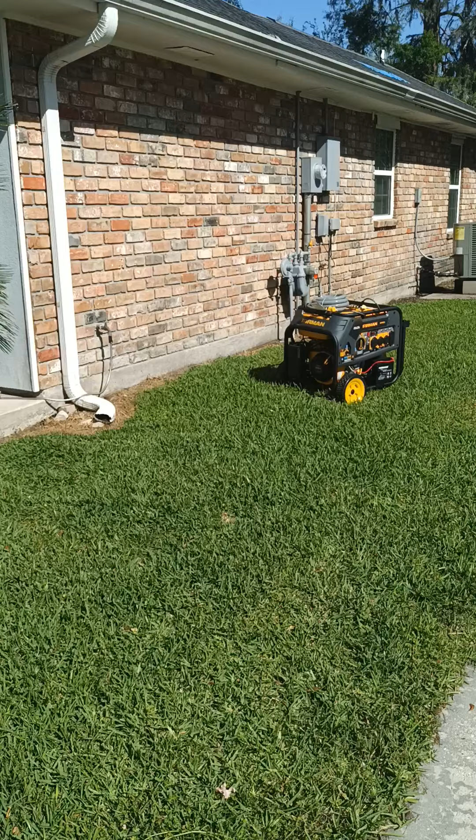All right, guys. This is the next morning. As I promised you, I'm gonna do this the next day. I'm gonna show you how to install it, attach it to the gas meter. Before I do that, first

we're still going through construction from Ida. That was like 6 months ago. This guy's house was completely totaled. He redid the whole thing. He's still working on it. Anyways,

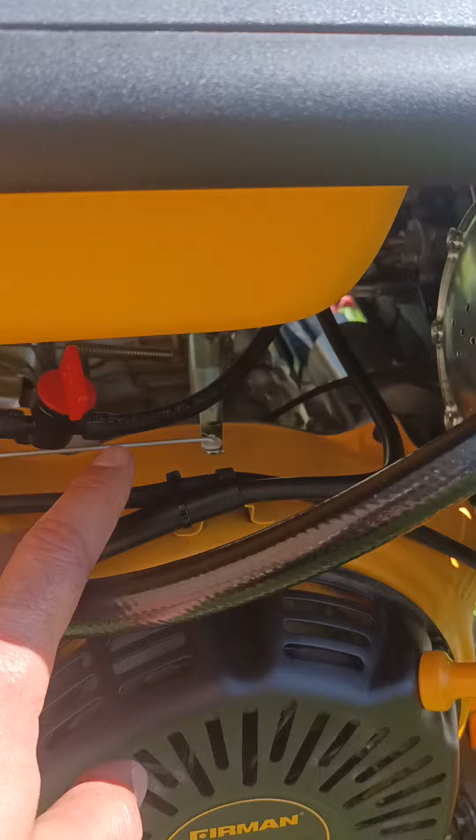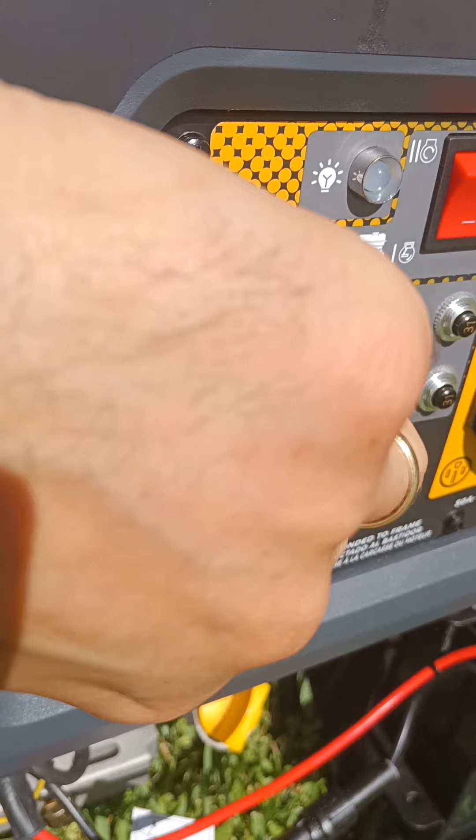I've been telling you about the shut-off valve for the gas. So there are two places from the gas tank that hoses go through. There's one here and one here. Now this one I put because this is the one that goes to the switch, which you turn on this way. That's the one that needs to be shut off.

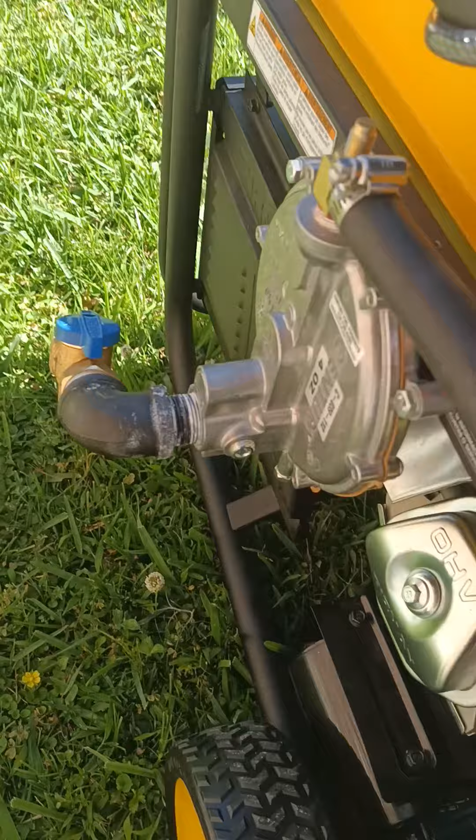I'm not sure exactly what this one is, except this one goes down here to this thing, and from here it goes back to the, what's it called, the air filter. So I don't think I have to do anything with that. I think what it's for is the gases from the gasoline tank will get sucked into the air filter and reused to burn more efficiently. I guess that's what it is. I don't think we have to put any shut-off valve over there.

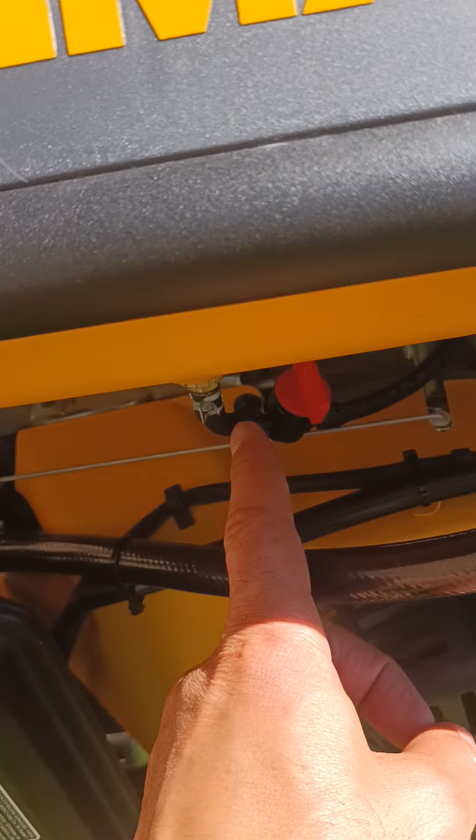All I did here, I cut, this was just one piece. I cut it with a pair of scissors right here in the front. So I put this one this way, one this way. This valve, I bought it from Ace Hardware for a lot of money. It's not worth $10, but hey, I just needed to do it. I did not use anything here or here to make it tight like this. It's very tight already. Make sure you put it in the right way.

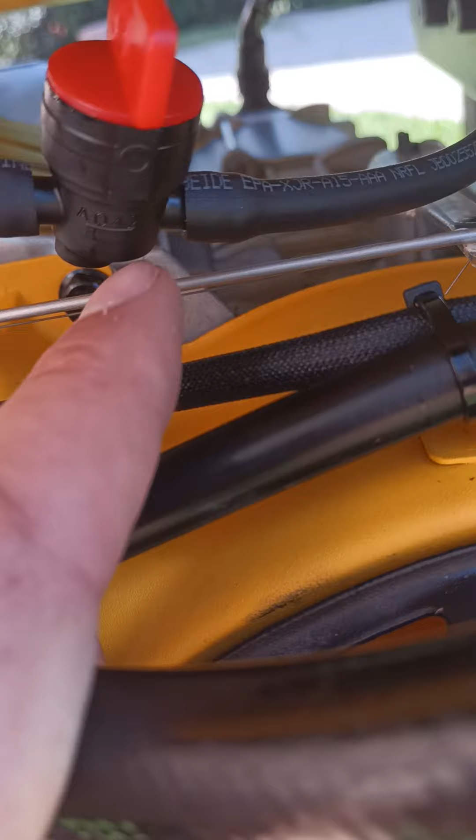There is a marking on it that says flow. I don't know if you can see it. It just says flow. So the arrow is this way. So it has to go from here right there, going this way. Right now it's in the off position. This is the on position, so we're gonna leave it in the off position.

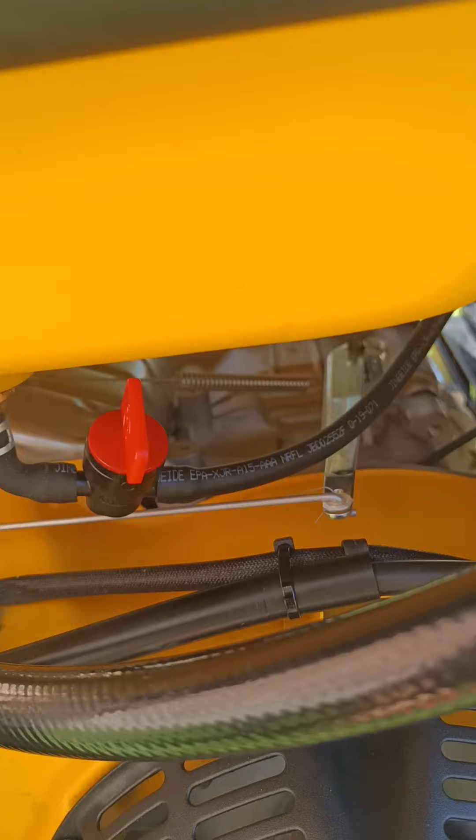That's one thing. Another thing is I kind of regret putting the regulator on this side. I wish I would have put it maybe in the back. The reason is, going through the doors and stuff like that, this is just a piece of chunky metal that's gonna hit everything. You don't want to put it in the front where the exhaust is. There is no space here, nor would I recommend to put it here.

But here, right there, where the air filter is, if I want to do it again, I would recommend just to put it up here, right here, away from this. Yes, you're gonna have a little bit of a hard time getting to this, but it's gonna come down all the way here, so it's gonna cover this. You still can move this if you needed to.

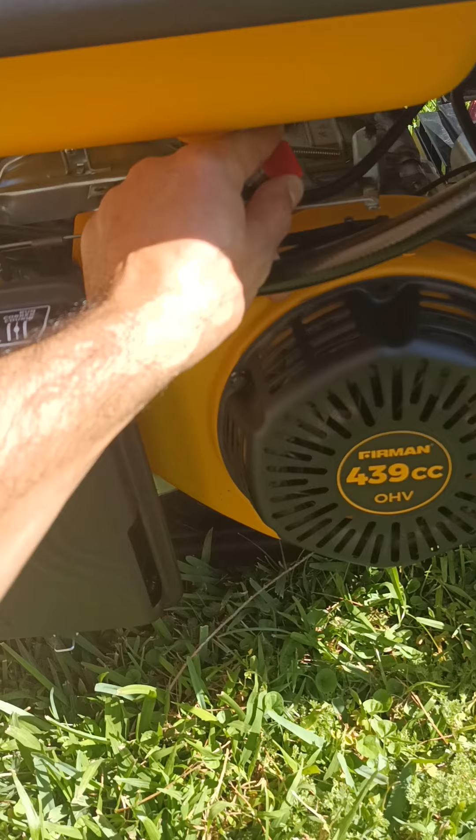Okay, but yeah, I would put it right here. The only problem is, number one, it's not flat, so you got to be careful how you drill through it. Number two, the gas tank is closer to this. It's gonna be really hard to put a screw in. You may have to put the screw at an angle like this inside, so that you could actually put the nut down here instead of going straight. But you can figure it out. Anyways, if you haven't done what I've done, put it here. That's the best place.

Okay, now this is my hose. I got this 15 feet, 3/4 inch. Very important, 3/4 inch. I got this from Amazon. That's the best price I could find. I looked around a lot, and it's really hard to find 3/4 inch gas pipe. If you go there, I think you can put 3/4 quick disconnect natural gas, and that's what's gonna come up.

So I'm gonna show you how I'm gonna put this all together. One side of it is gonna go in here, the other side is gonna go on the meter. I think it costs $160, but it's made for natural gas. If you go 1/2 inch, you may not have enough pressure for your generator to run off of it, so you will not have much performance. Anyways, now let's go to the gas meter. All right, this is my gas meter. I'm here in a suburb of Louisiana.

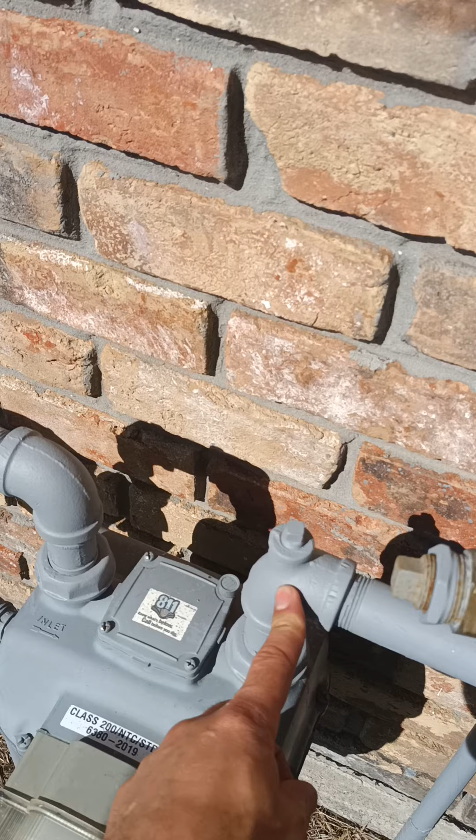All right, here. This is the side that goes through the meter. It gets metered, they know how much you're using, and you're gonna go up here. This is the side you want to put it on. Now, some states have something right here, just like this with this thing on top. Some of them have a T, like this side is a T and it has a plug like this on it.

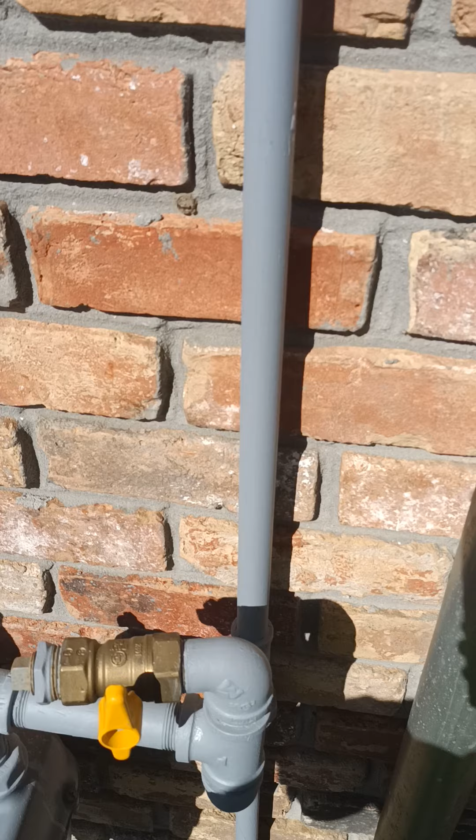Depending on what system they're using and what state you are in, this or the T on this side is for changing your meter. It's a bypass to change your meter. So absolutely do not put anything on the T here or do anything right down here. Anything you want to do, you have to do past this one. When you see something like this or a T on this side somewhere, you have to go past that one. You cannot use that one at all.

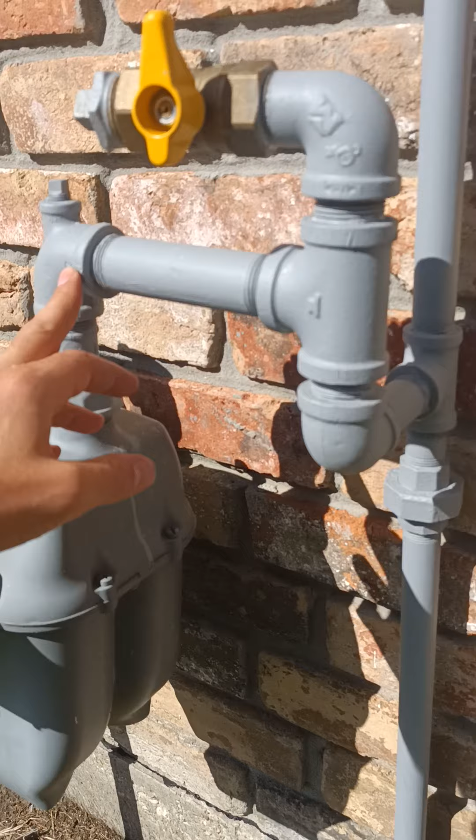So let's say if you had it up here instead, some of them do, then you have to go down below it and get it from here. In my case, it's right above the gas meter. Unfortunately, mine is a little bit more complicated. It comes here, it breaks into something else, one goes up to the attic, and the other one goes down underground, which is not a good thing. You don't want to have gas pipe going under the ground. So I may have to disconnect it later and run everything from the attic.

Anyways, never mind. What I had before was, it was coming here originally, then this was also an L, just a regular L like this one. It was an L going down, another L going here, going up and down to ground or to the attic. So obviously I shut off the gas right here. Be very careful, you do not mess around with this. I gotta tell you this, I wanna make sure.

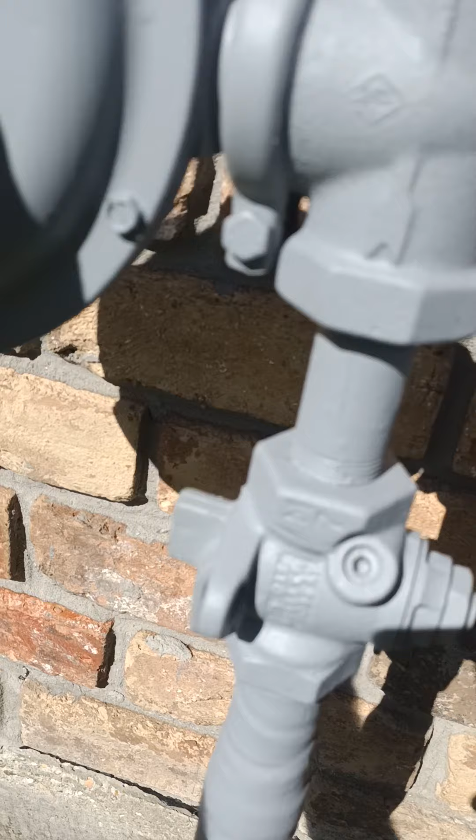First of all, I was certified for gas because I work for the gas company. If you cannot, you do not do what I'm doing. Do not do this. Never ever touch this nut. You do that, it's gonna blow. This is gonna shoot out really fast, and you're gonna have blowing gas, and that's gonna cost you a few thousand dollars plus. God forbid you get injured or you have a fire.

When it's showing upwards this way with the line, that means it's open. If you turn it this way, horizontally, it's closed. If you go up again, it's still open. If you turn it again and go this way 270 degrees, then it's closed. If you turn it back again this way, it's open again. This thing you can turn 360 degrees on and on. It's not like a screw kind of thing.

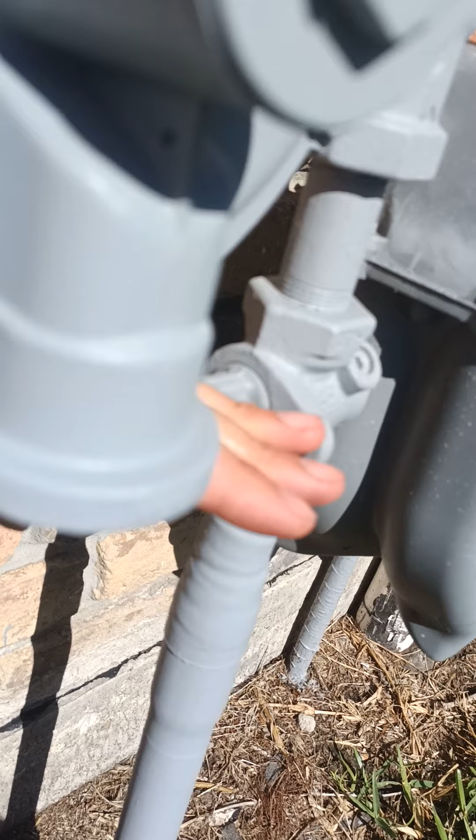So vertical like this, lining up with the gas pipe, means it's open. Horizontal like this means it's closed. So whether I turn it off this way or this way, it doesn't matter, it turns off. So I turned that off.

I had to open this right here. All right, the spot right here. There is a washer down there. The washer usually needs to be changed. Mine was in good condition. If it's not good when you take it out, it's flat or it's already cut, then you're probably going to have a gas leak later. You need to replace that one. Once I did that, I removed that.

I removed this. Remember, this was an L, just like that. You had an L here, this wasn't there. So I removed this nipple, the pipe is called a nipple. I removed this nipple, turned it out, took it out. I removed this T. This was an L. I removed the L, put this T in so I can go up as well. Put that back together again. I didn't turn it on yet.

Here, as you can see, I put a closed nipple. That means a very, very small pipe. And I use a street L, or you could use an L and another nipple, but this is just one part instead of two parts. And then I use the valve, and you can tell I plugged it up.

Now, I have 3/4 here, and I really like the fact that it's 3/4, so it's a lot of pressure. I'm sorry, I take it back. That's not 3/4. That's 1 inch. This is 3/4. 3/4 is normal for a regular house, and that's why you have a small meter like this. This is 1 inch. So I go 1 inch. I continued 1 inch all the way here.

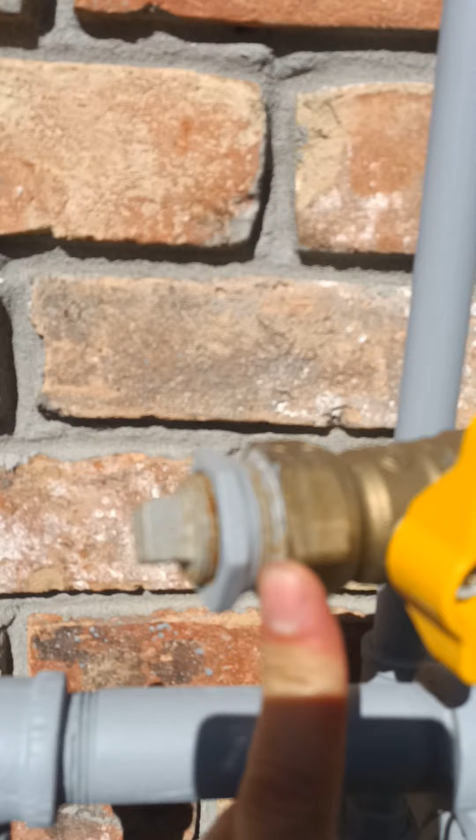This is 1 inch. I have the plug, and I have, what's it called? A reducer. It's not called a reducer. It's something else. I'm gonna come up with it later. So I put this in. It turned it down from 1 inch right here at the valve to 3/4 right here. So now when I remove this, I can remove it from here going to 1 inch if I wanted to, or remove it from here going to 3/4.

Now, the pipe I showed you over there that I'm gonna use is 3/4. So I'm gonna actually use this one right here. Take this one out, leave this in, because I do need to have it this way. The reason I went 1 inch, in case later I want to put another T here and get something else. Let's say I want to get a barbecue away from the gas meter, obviously, or I want to put a bigger generator, like maybe a whole house generator by Generac. They probably require 1 inch.

I'm not sure. Anyways, you could always reduce it, but you cannot increase it. If you increase it, you still have restriction here. So this is all 1 inch. It comes in 1 inch. It goes there 1 inch, right? It still goes 1 inch here. Then right here, you see, this is a reducing L, 1 inch to 3/4. It goes 3/4 up to the attic, down to the ground. So the house gets 2 3/4.

The reason they did it that way, 2 3/4 should be fine. Now, if I want to remove this one on the bottom, probably I have to make all of this 1 inch and going up. But that's not your problem. So just want to explain why I did what I did.

Hint. Do you see this valve? I don't know if you can. Here you go. Do you see you have this seam right here? These valves are not good. Do not use them. If you can find one that doesn't have this, get that one. Reason for that is we had a lot of problems when I was working at the company. Sometimes you're trying to loosen this, it actually turns from here, and then you cannot turn it back again.

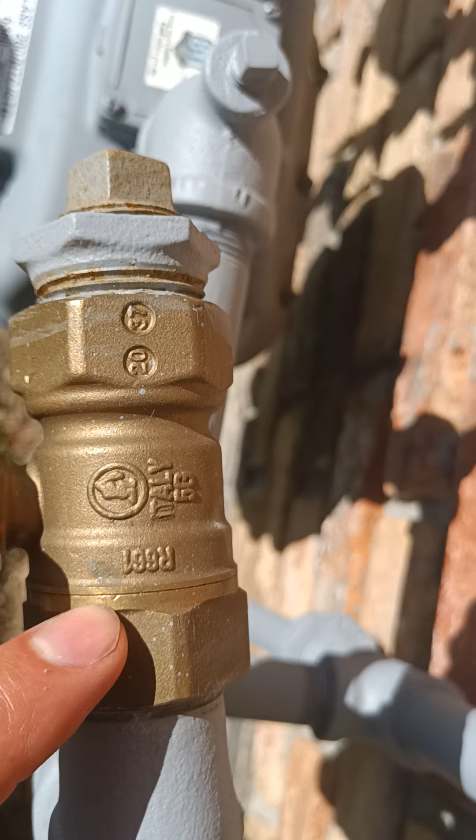That doesn't seal anymore. It's a factory fitting, it's not gonna seal. You have to change the whole valve. And the whole reason you put this valve in is you can do whatever you want to do here without shutting off the main valve down here. So if you have to remove this valve, now you have to go ahead and shut off the whole house, because once you remove this, gas is going to shoot out. So get a better one.

I didn't find anything. It was hard to find it. It was during Ida, obviously, when I put it in. And yeah, don't do this. The one that comes from this company, Century Fuel Products, that we got all of this from, that one doesn't have anything.

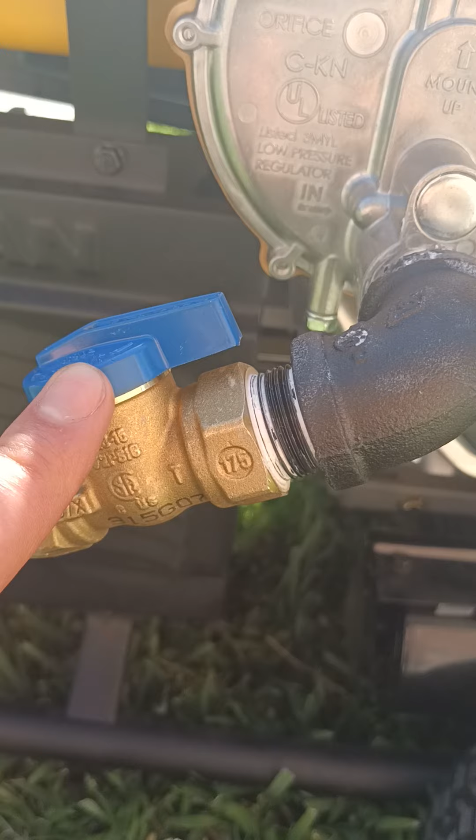Is one piece, as you can tell. This is a good one. It has nothing to do with the color, by the way. It's not like whether it's red or yellow or blue. They all have those kind of colors for some reason. But just make sure there is no seam in between. This is just one whole piece. This is a good one.

Okay? Alrighty. Now next, what we're gonna do is we're gonna remove the plug while the gas is off. This is off. This is on. Okay, nothing's gonna come out because it's plugged. So we're gonna remove this one right here. I'm gonna leave this in. Then I'm gonna attach the quick disconnect. On this side, I'm gonna attach the hose.

I was looking for another quick disconnect to attach here, but unfortunately those things run for like I think $54 at Amazon right now because it's 3/4. If it was a half inch or something, it would be so much cheaper. I may still do that, but not right now. I just want to do it this way. So I'm gonna put this together.

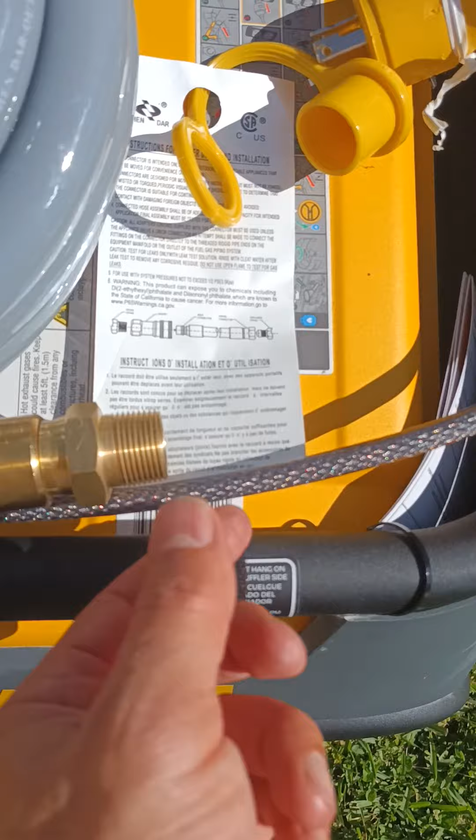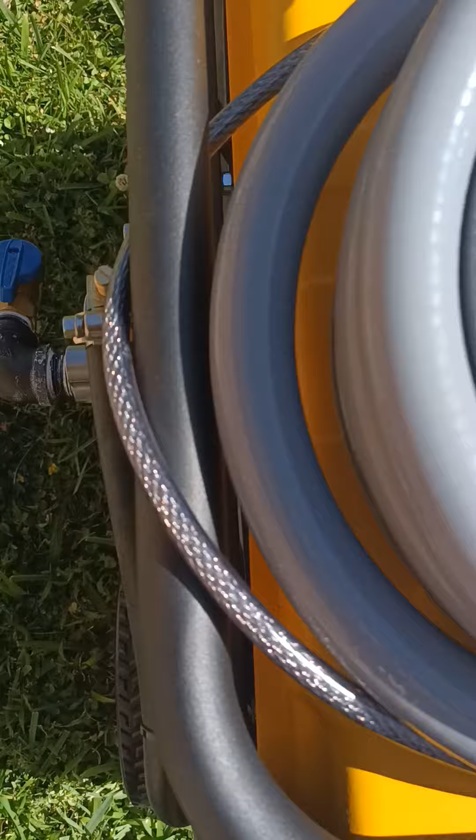Again, what we have here is on this side we have 3/4. I'm gonna put some dope, which is that sealant, the pipe thread sealant. Put it on here. This thing does turn like this, even though it's sealed in here. So I can actually use a crescent wrench. So this side is turning from right here, but it's sealed inside, so it will not leak. So I put the thread sealant on here, use the crescent wrench, and put it at the valve right here. So pretty much this way it's gonna be always attached.

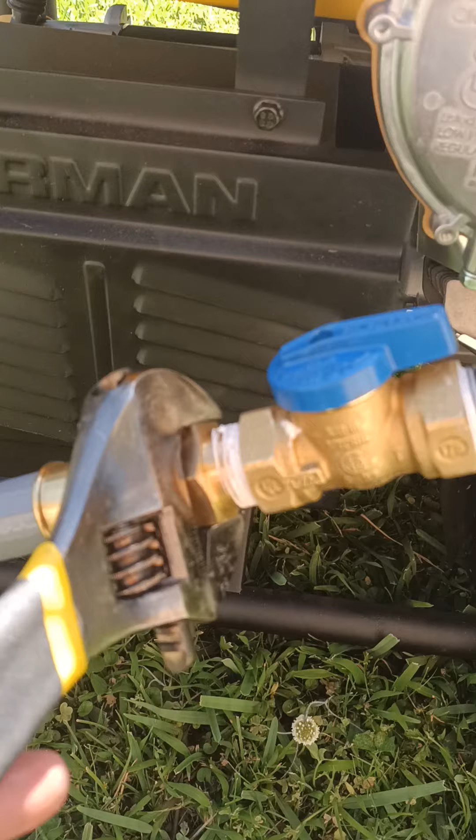So now you have this chunky thing hanging on the side, and you have the pipe hanging on it too. So then I'm gonna put the pipe on top of it, I guess. And then on this side you're gonna have the quick disconnect. All right, this is the generator side. I already put this 3/4 nipple with sealant on it inside this 3/4 gas valve, and I'm turning it.

You need to back it up on this side or this side as well, just so this doesn't move. But you're not going to tighten it too much because this is brass on brass. Brass is actually good, it seals really well. But yeah, always back it up with another wrench. So this is the 12 inch crescent wrench. Use that. Do not use the pipe wrench, because the pipe wrench is gonna put marking on this.

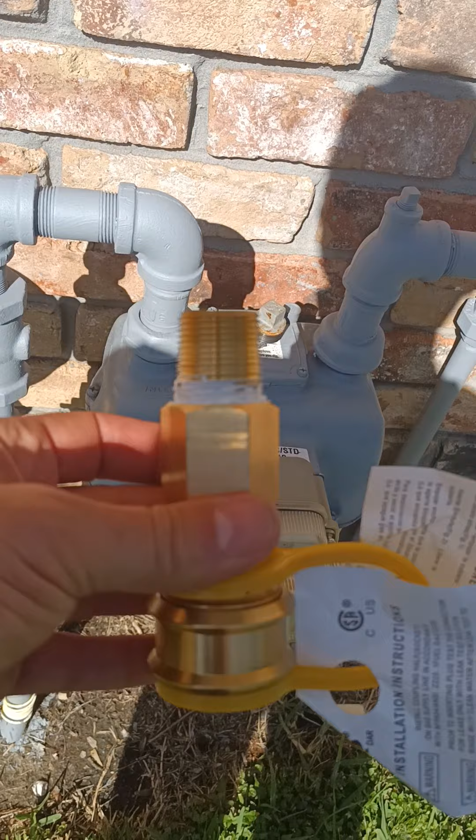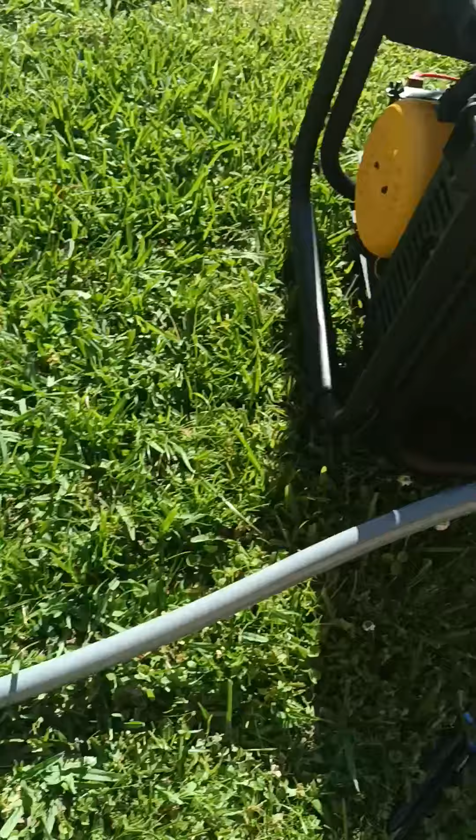Okay, on the gas side, I removed the 3/4 inch plug. I'm still gonna leave the reducer here because what it does is it takes the 1 inch into 3/4. So I have 3/4 here. This is the other side of the quick disconnect. That's gonna go in here later because that side is already in, and the valve needs to be shut off. Right now it doesn't matter, but you need to shut it off for later. So this side is gonna go inside. I want to show it later.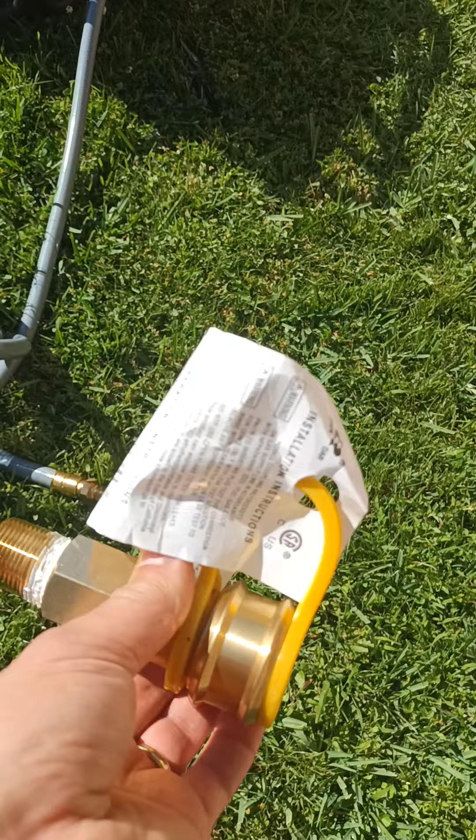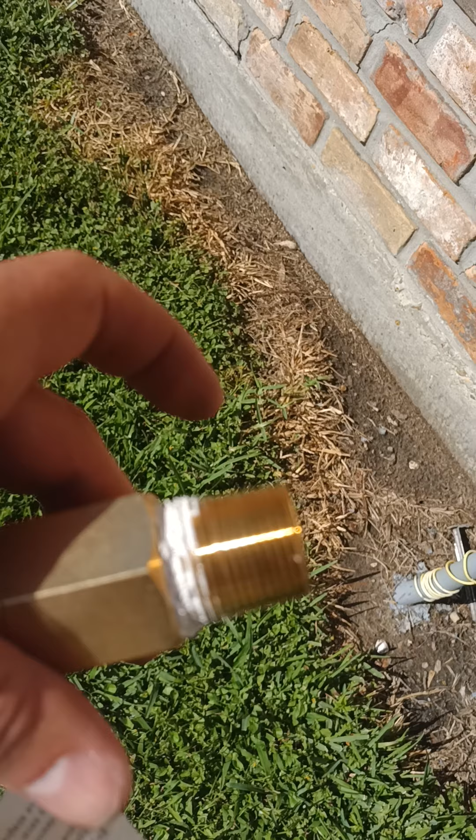So I had to buy a nipple right here. This didn't come with it, so I had to buy a 3/4 inch nipple, closed nipple, meaning the shortest one. I already put sealant on it, and I'm gonna put sealant on this side as well, because that's how I'm gonna connect the quick disconnect to this side of the pipe. So it's gonna go in here, but I'm gonna put some sealant on this side as well. Then I'm gonna tighten this.

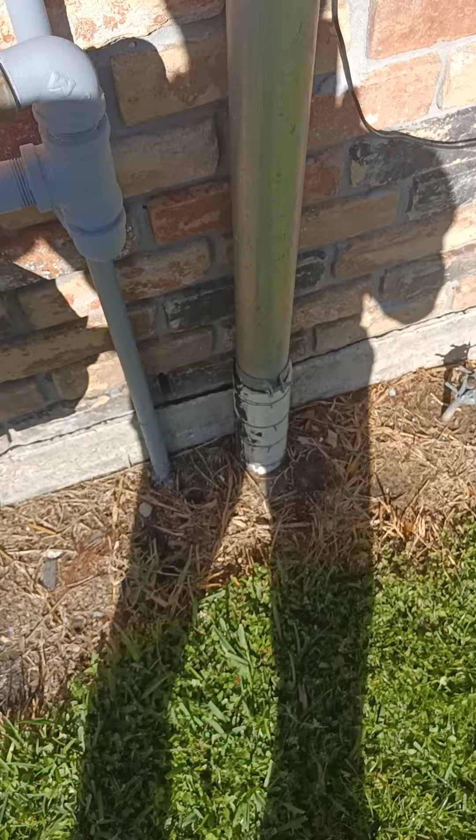Guys, I know this video is very long, but I used to watch videos on people doing stuff and they would just jump the steps and I would be confused. So that's why I'm doing this so slowly. I show you everything. Anyways, I put this in.

I just saw, you know what, I didn't have to get a brass closed nipple here. I could have gotten just an iron one, because it's not brass to brass, it's brass to iron to brass. So I could have just made it iron, doesn't matter. Also, when you do this, obviously I used another crescent wrench, the same crescent wrench for this and this side.

You want to back this side up, so you probably want to put a pipe wrench on this one, not on this. This is brass, but this one is iron, just so that none of this turns. Because remember that place right here that I showed you, that you've got to be very careful with. If that moves, it's game over. It's going to make it leak. So you want to make sure this doesn't move.

You don't have to tighten the heck out of it. We have a lot of sealant. This is brass, it seals also, and it's kind of low pressure. We still have to go afterwards, after we connect everything, and soap check it to make sure it's not leaking.

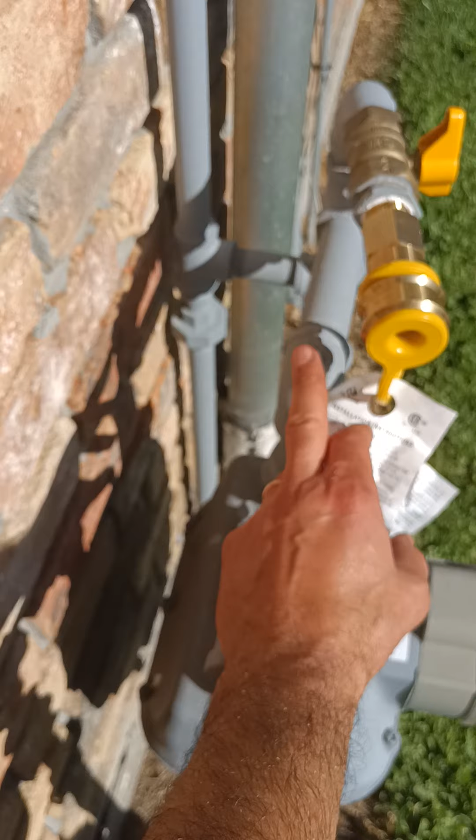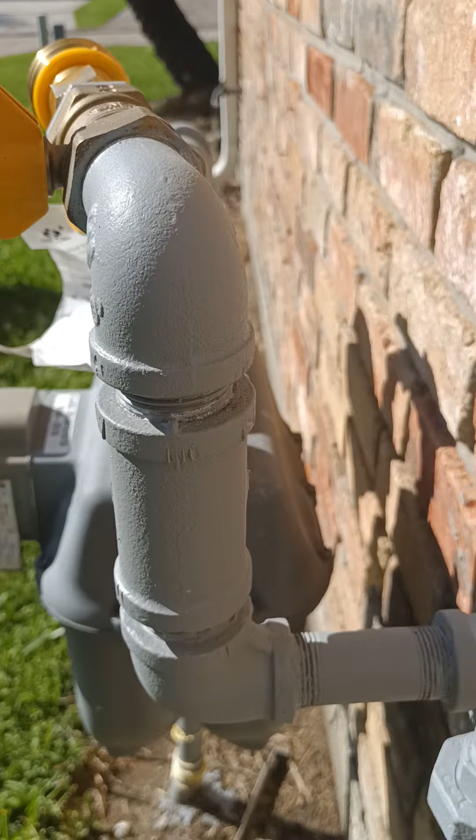I just want to show you another thing. See how it's right over this, and remember I told you they're using this to change the meter. That's a bypass. So that's why when I connected this originally, I actually connected it at an angle. I don't know if you can see it from here. This one up here is like this, and that one is like that, so that we do not cover this up. We do not want to cover it.

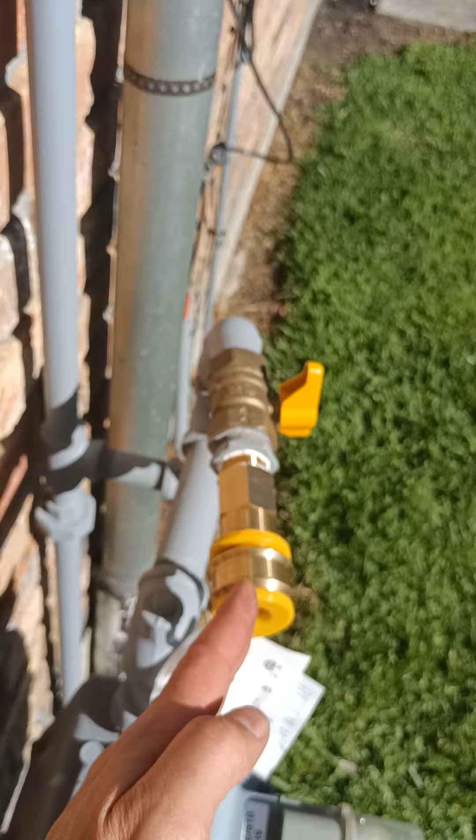I could have moved it this way towards the wall, but I didn't want the pipe to touch the wall, and then the vibration of the generator would just rub it against the wall like sandpaper. As you can see, outside is rubber, inside I'm thinking it's a corrugated metal, like CSST type. But once you have the outside scratched up, the inside is open to rain and rust and leakage. So this is the reason why I'm doing that.

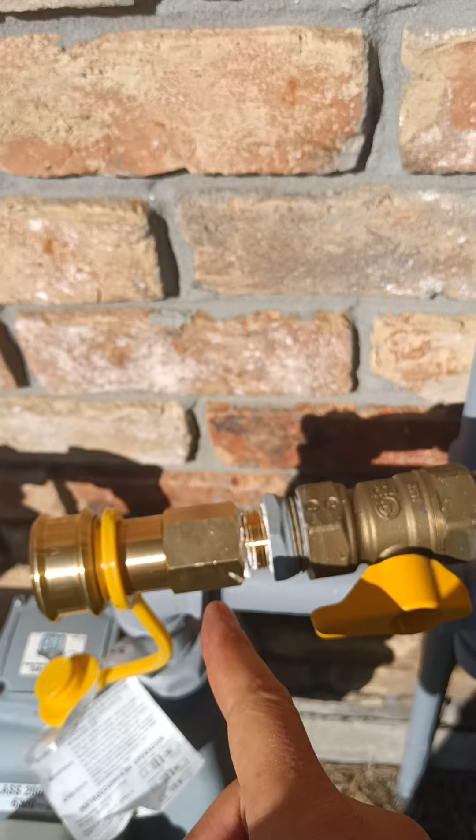Next we're going to go ahead and actually connect this to this. But before we do this, I want to show you: when I took the plug off, if I did this, the gas would have just gushed out. You would hear it and smell it. It's not a good thing because we have the electric meter here, which is a source of ignition. Some states wouldn't allow you to be that close anyways, but this has been grandfathered in.

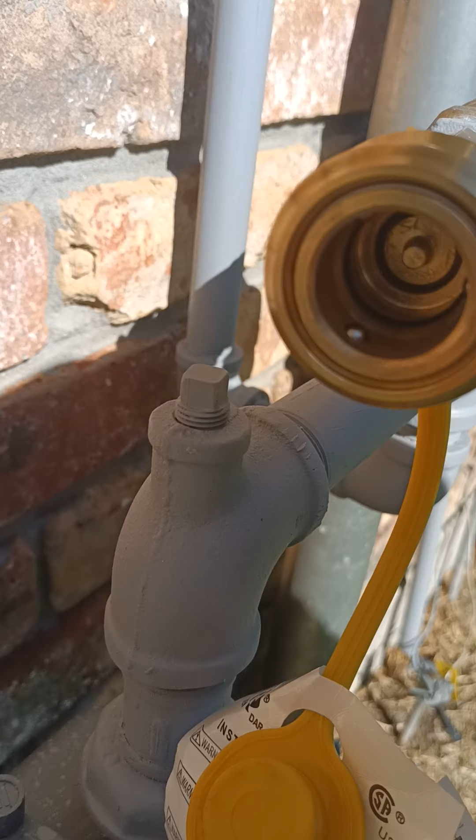But with a quick disconnect, this could be on and it holds it. Nothing comes out of it. The only time something is going to come out of it is when you put something in. I don't know if you can see it inside, there is like a washer kind of thing inside. I hope you can see that. That's going to seal the whole thing.

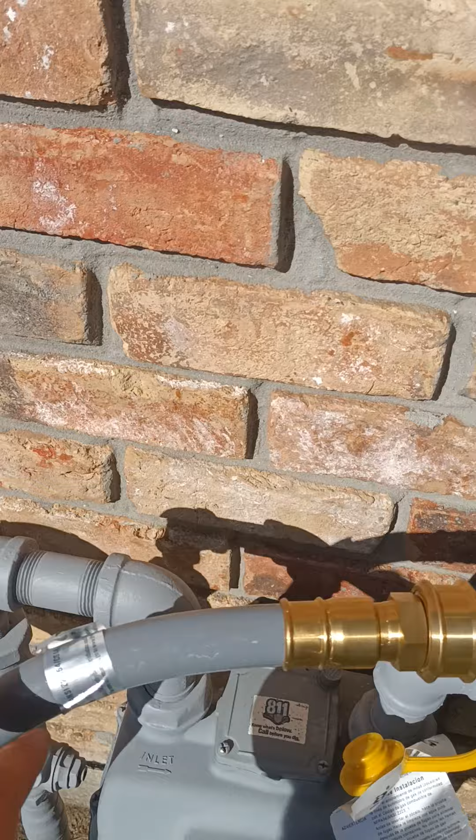So basically, I'm going to move this back like this. I'm going to put this in. Here you go, I did it. Right now we actually have gas access here, but understand we have gas all the way to here. The rest of it is all air because there was no gas in the pipe. So the pipe is already connected. The gas stopped all the way here, with the air right before it.

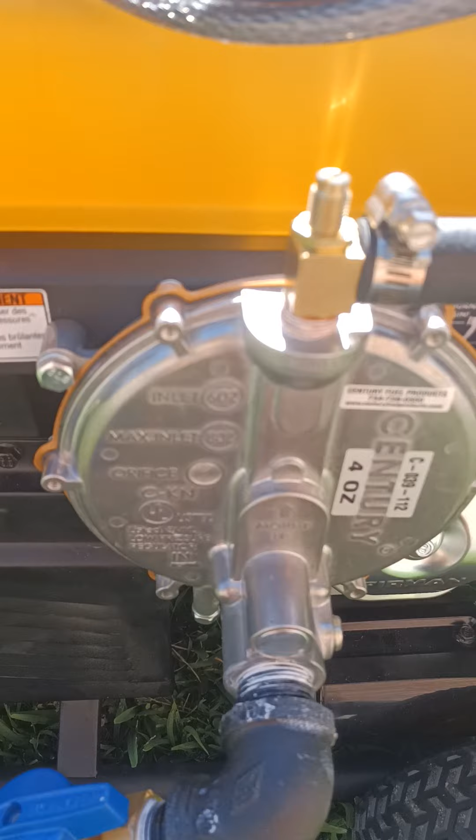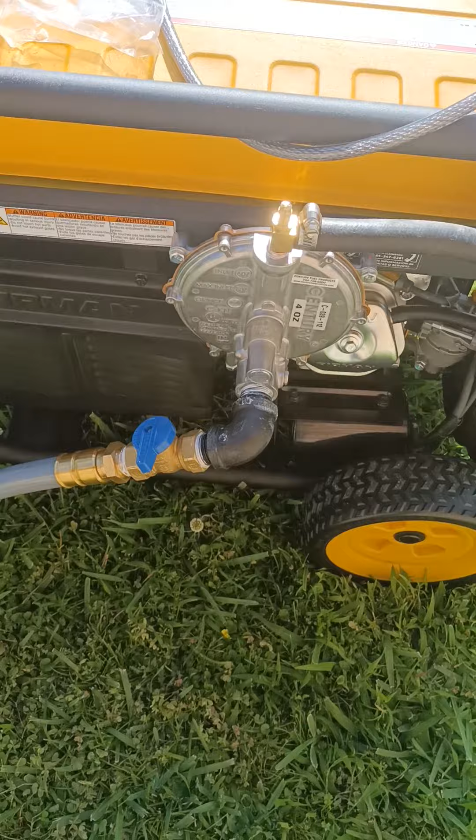I wonder what happens if I open this. Nothing. It probably put some pressure on here, but it locks it because there's nothing going on right now, so it doesn't allow any gas to come through, which is a good thing because we do not want it to fuel the carburetor with gas because it has pressure while there is no demand. Apparently it doesn't do that. I'm a little iffy about that, so I'd rather have this closed anytime I'm not using the generator. I'm just going to close this one and the other one at the meter just to be on the safe side.

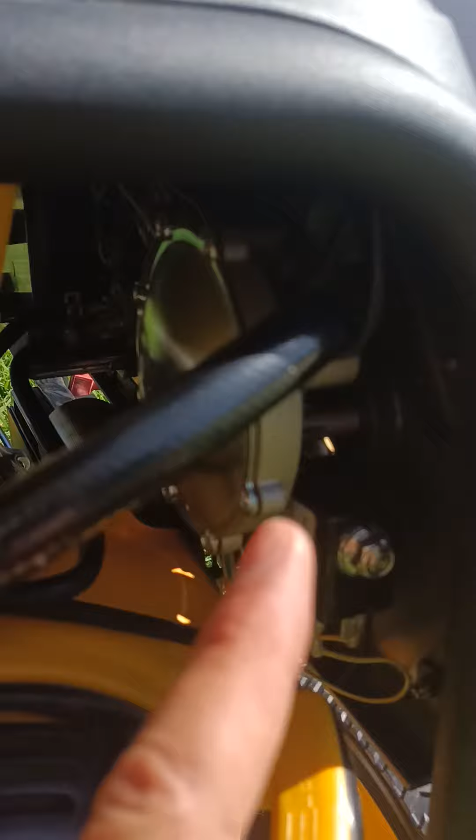Just in case, if we had the other Firman generator, which has gasoline on this side and LP, liquid propane, and natural gas on that side, every time you leave it off, it would shut it off. There is something here for the propane. You can see it actually. This is the regulator for the propane. You see this? That's a shut-off relay. Once you put it on propane, this actually opens up this valve, and the propane goes inside it.

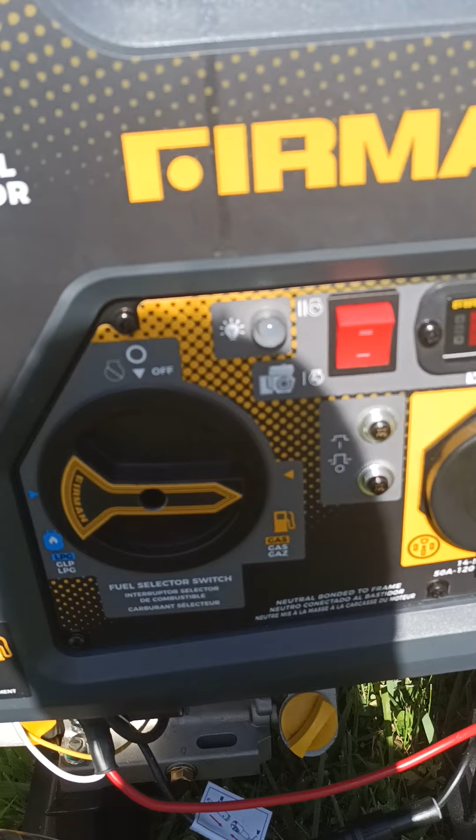And when you turn it off, like it is right now, it will shut that valve off, making sure there's nothing coming through. So this is going to be valve open, this is valve closed, and that's going to be valve open to the gas. And this, by the way, is the place we're going to move it to, because we want to turn it on this place. That's why we had to shut off the gas pipe to it, because it will try to get gasoline as well. So we shut it off, but we're going to use natural gas instead.

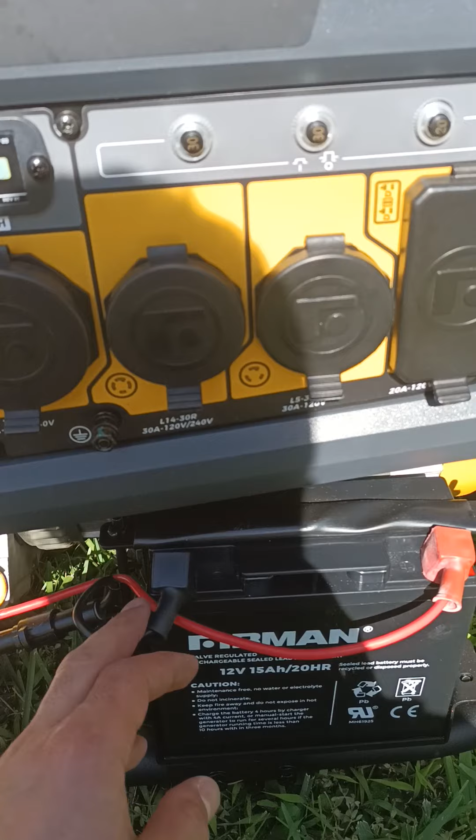Okay, final checkup before we turn this thing on. I just put the negative side back on the battery because I left it open before. I didn't want it to go out of the charge. It may have gone out of the charge. If so, then we have to do it manually because the starter is not going to work. But anyways, I just put it on.

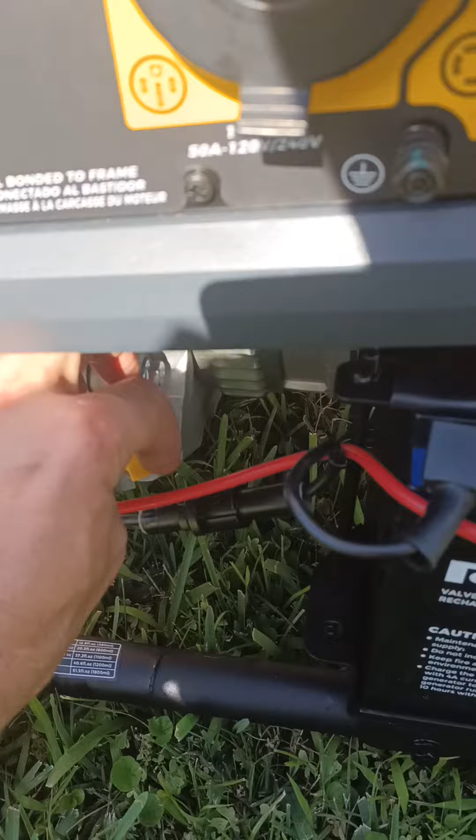I changed the oil last night. The oil is good. If the oil is low, it will not turn on and you're going to be scratching your head. What did I do? Why is it not working? There you go. All right. Let's see. All right, this is hard to put it in. There you go. All right. This is off position, very important.

Here we have the choke. It didn't say anything about leaving the choke on. I think we're gonna leave it off, just the way it usually should be, so that valve inside that we saw when we opened the whole filter thing, it was open. It's still open. All right.

This side, we have the valve closed as well. The other side we have the valve open. So there is gas right there. There's a lot of air right here. We have to purge this, and everything else seems to be fine. There is nothing else.

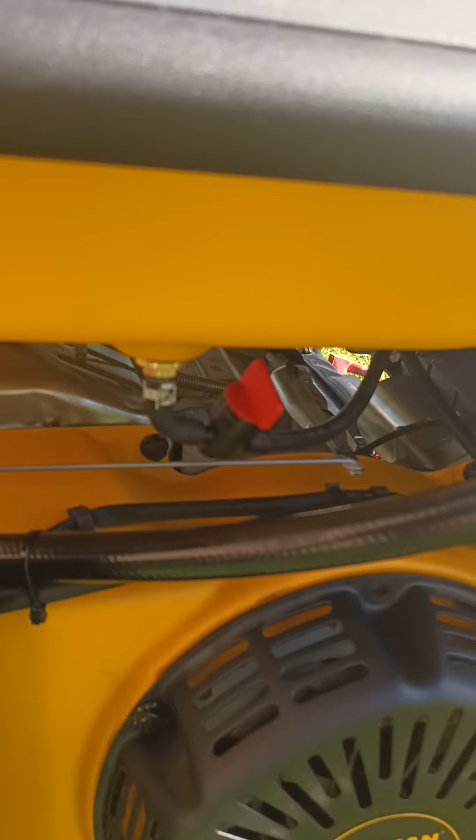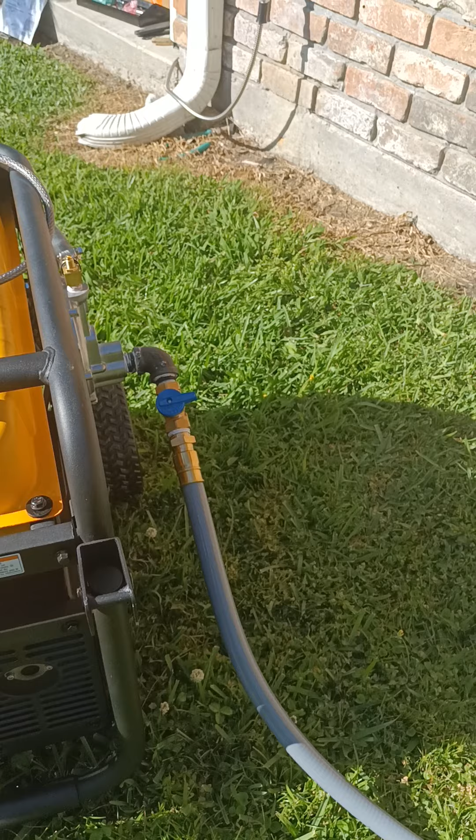The valve for the gasoline is off as well. That's very important. You don't want this to be on. If you use gasoline, you have to make sure this is off and it's not connected. But even if it's not connected, it has to be off. So be very careful about this. Alrighty, I think we are ready to go.

Remember, we have to purge a lot of air out of here. I probably should have left this open, purge the air out, so that the gas would be here. But there is a thing on the back of the regulator we're gonna push to do the same thing.

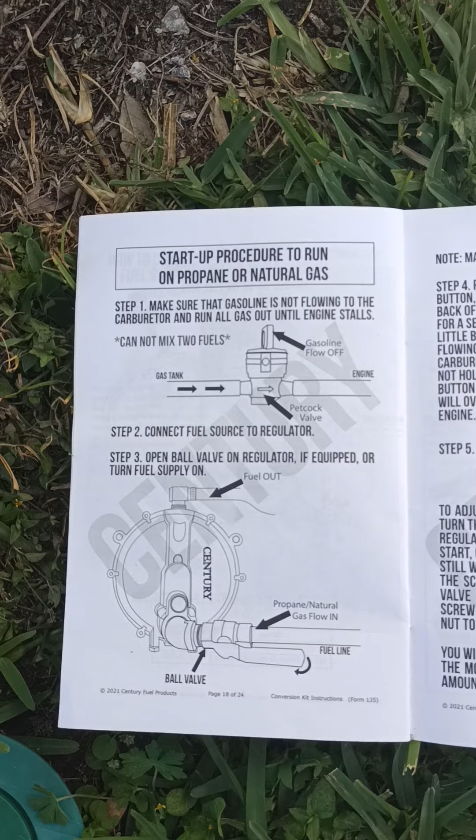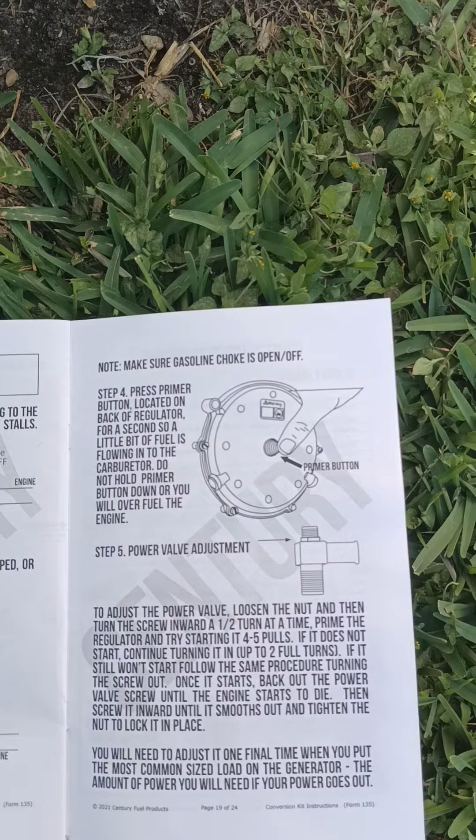Okay, let's read this. Here on page 18 of the owner's manual, it says turn off the valve to gasoline, turn on the ball valve to the regulator, the one that we installed, and now we have to do the prime. On page 19 it says this: press primer button, which is in the back, only for a second, so fuel goes into the carburetor.

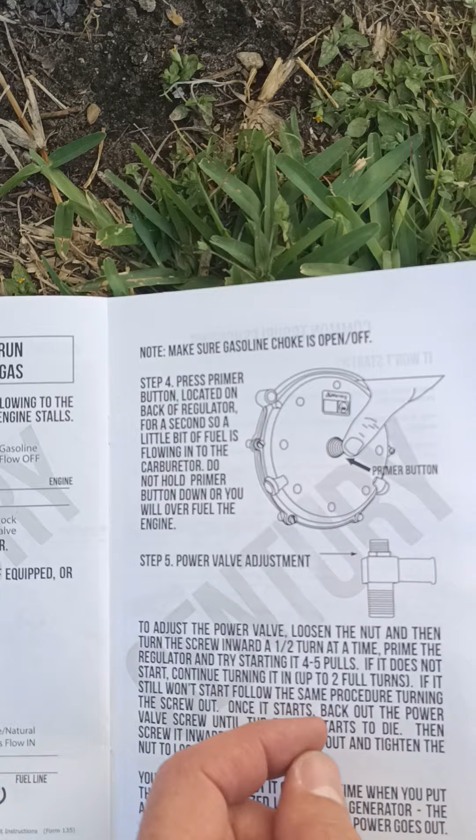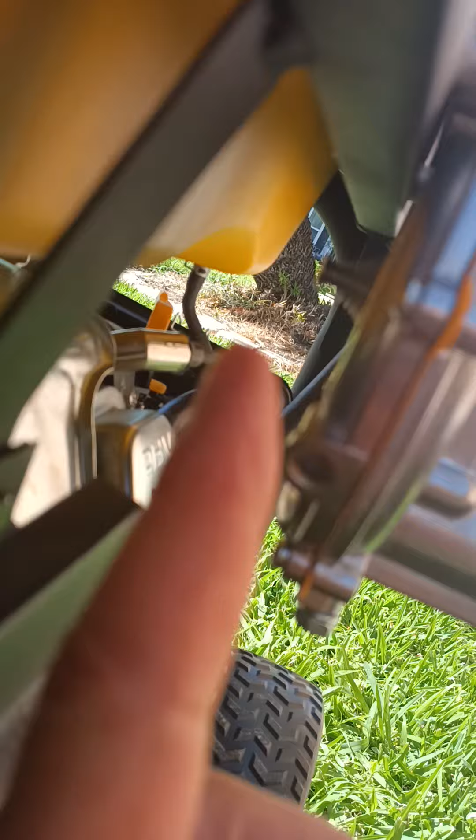Fuel is natural gas. However, understand we cannot do that just for a second. Reason for that is we have a lot of air. We're gonna purge this, so I'm gonna open this, and then I'm gonna push that button on the back right here, but more than a second. Let's see if you can hear something. Do you hear that? I'm gonna do that until I smell some gas.

Okay, I smell gas. Now, understand at the beginning there is gas and air mixed in there until the whole thing purges and becomes gas. Right now I'm gonna wait a few minutes because I want the gas to evaporate. Now, natural gas, unlike propane, actually evaporates and goes up. Oh, I smell a lot of it here.

All right, right now it's shut off. It's not flowing, but to be on the safe side, I'm gonna shut this one off too. So we should have gas all the way to here and maybe even the carburetor. But I'm gonna wait a few minutes for the excess gas to just evaporate, go up, and I smell a lot of gas. And then I'm gonna go ahead and start this thing. I don't want to start it with gas around.

Now, natural gas, people think is very dangerous. It's gonna blow up. Well, I was around it a lot. I was sent for leak checks and stuff like that, so I don't have as much problem with that as other people do. I don't fear it.

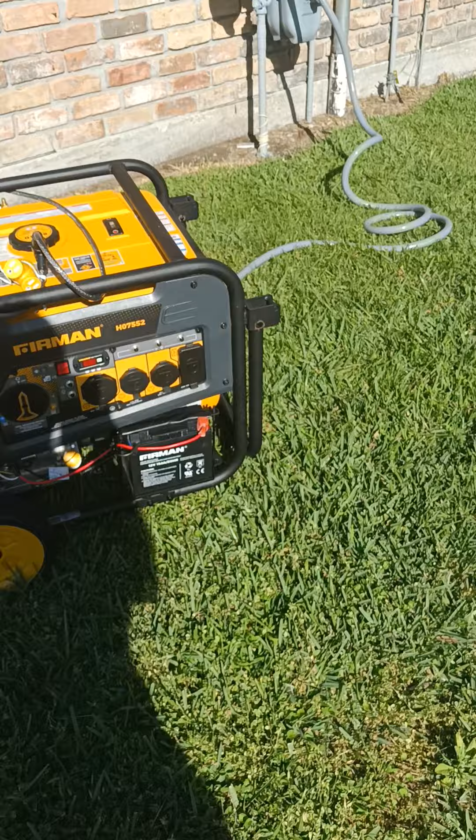There is a certain mixture of gas and air that's going to allow it to be combustible. So between, how much was it? 5% to, I believe it was 7% or 14%. Yeah, 14% of gas ratio to air. If it's anything lower than that, it doesn't have enough gas to burn. If it's anything higher than that, it's so full of gas that there is not enough oxygen to ignite. So that doesn't mean anything to you probably.

I'm just letting you know I'm not scared of this thing. I have seen a lot of things. I encountered a lot of explosions as well. I kind of know what I'm doing, but hey, you guys, don't do what I'm doing. I'm not doing anything dangerous right now. I'm just going to wait a few minutes until it evaporates completely. Then I'm going to get back to it and start it. All right, we just wait a few minutes now.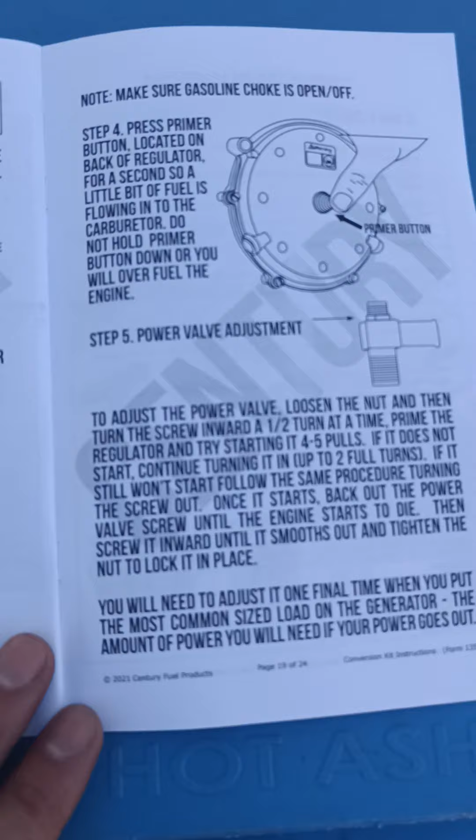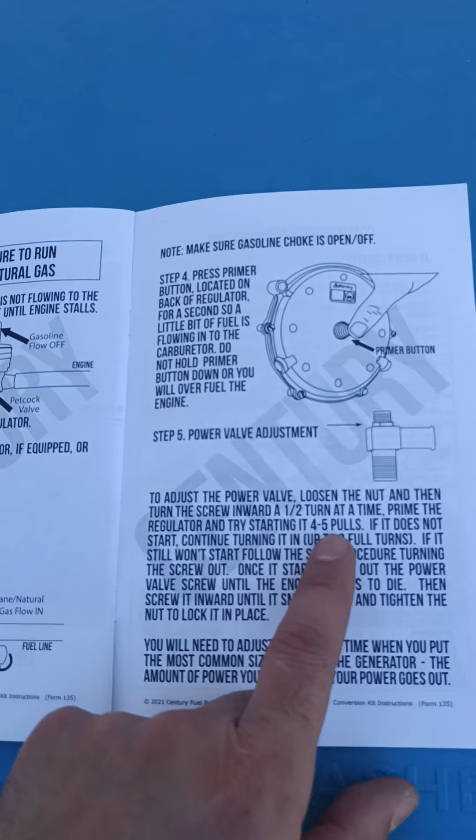Okay, let's read this. It says to adjust the power valve, loosen the nut and then turn the screw inward half a turn at a time. Prime the regulator and try starting it 4 to 5 pulls. We're not going to pull because we have a starter. Hopefully the battery is good. If it does not start, continue turning it up to the full 2 full turns.

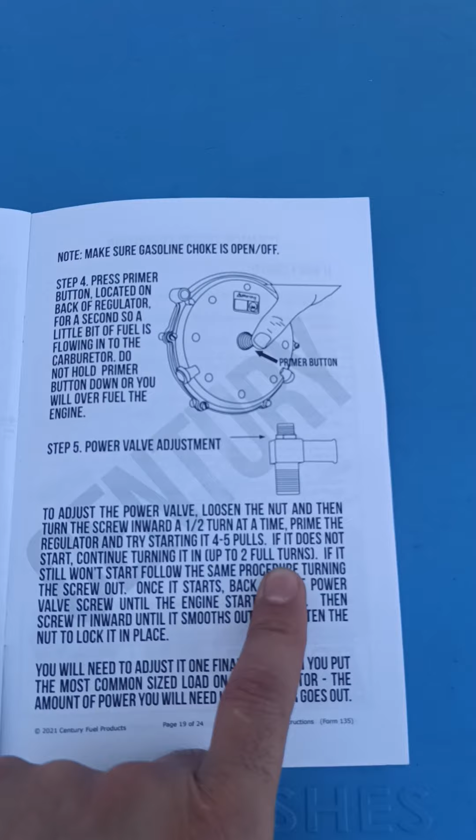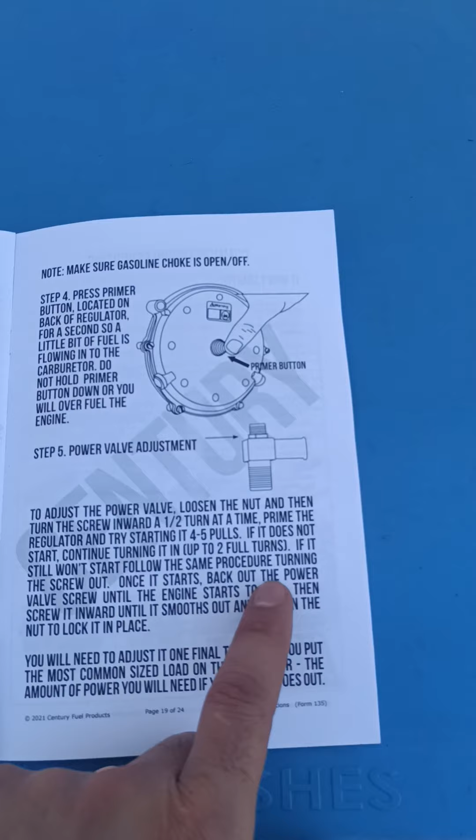The reason it probably would not start is, depending on how long your pipe or hose is, you have a lot of air, and then it just goes. If it still won't start, follow the same procedure, turning the screw out. Once it starts, back out the power valve screw until the engine starts to die.

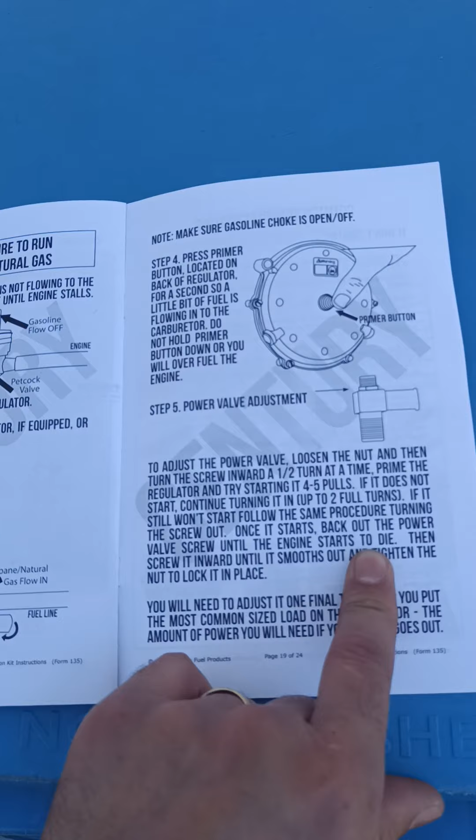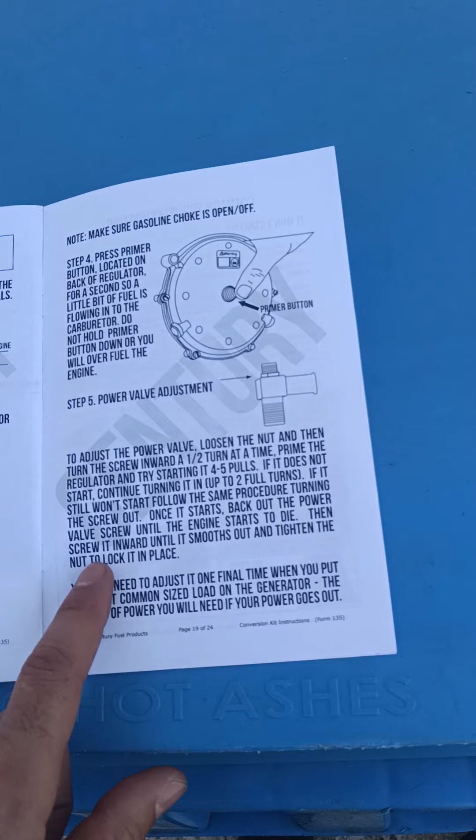So we're probably not going to do any of this except this last thing, just because we already filled it up with gas, or natural gas. So once it starts, back out the power valve screw until the engine starts to die. Then screw it inward until it smooths out and tighten the nut to lock in place.

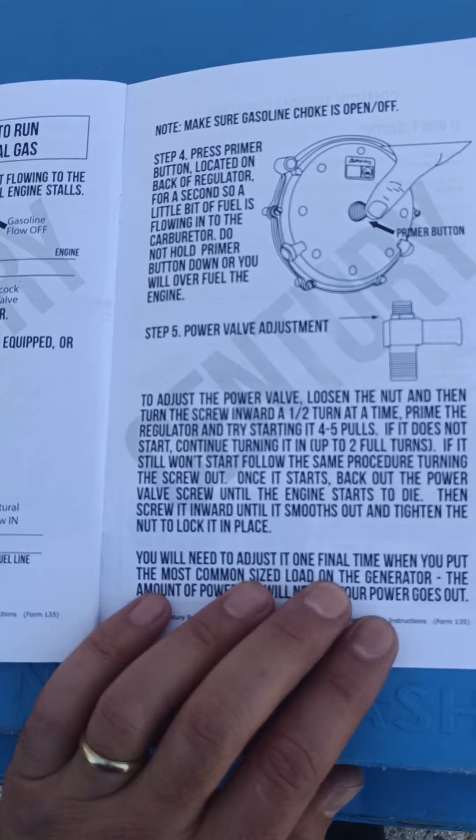So at this time, once it starts, we're gonna try to adjust it by first making it lean. That means little gas, so that the engine seems to be dying, and then we enrich it until it goes smoothly. If it has little gas, it's gonna go out. If it has too much gas, it's not gonna run perfect. So we're just gonna adjust the screw to the desired place, and then we're gonna lock it in. That's what is going on here.

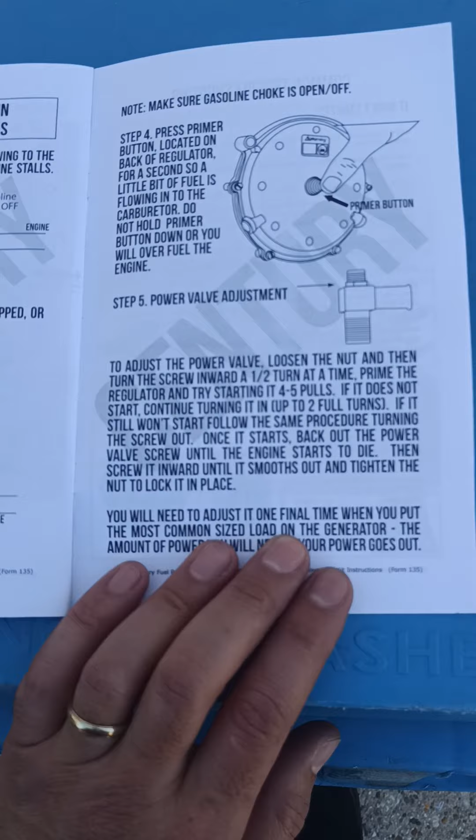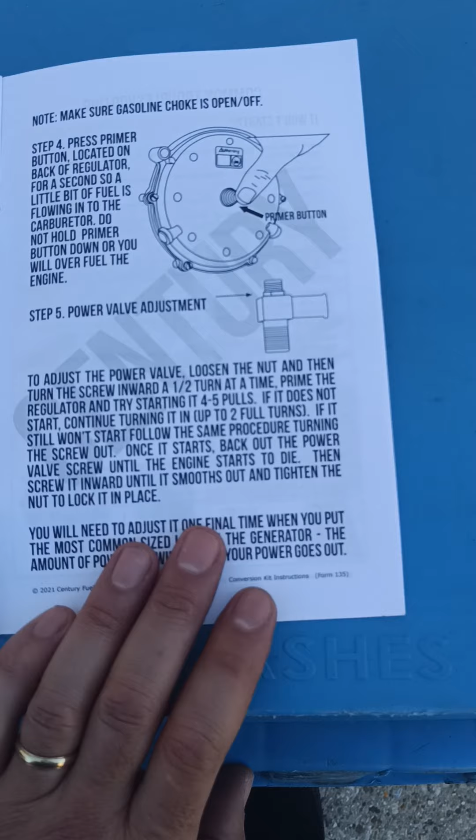So I will loosen the screw. However, I will just start it without doing anything, maybe half a turn, the one at the beginning, and then we go from there. It should turn on theoretically. So if it doesn't, I already know what to do. Number one, we have water over there. I can use the water to get rid of the fire.

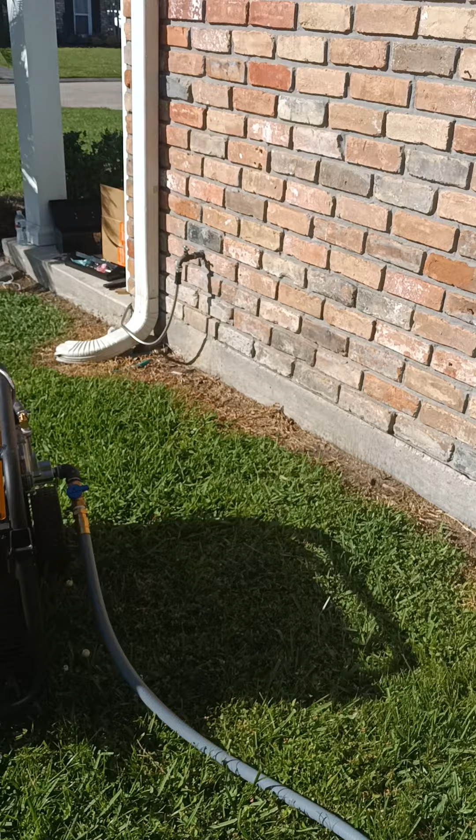Number two, or maybe I should do this faster. First, this is gonna go first. I'm gonna turn this off, and then I'm gonna use the water right there with the water hose to get the fire down, but it shouldn't happen. So as soon as I know there is no more leakage, I cannot smell any more gas, I'm gonna go ahead and then do these things.

Now, one more thing we can do right now is it's a good time to open this valve, and the other valve needs to be open as well, and just soap check. So you use a little bit of water and very little dish soap, and a brush, like a paintbrush, and then just go all over this connection that you made to make sure there is no leakage.

If you see any bubbles, obviously you're gonna stop, open the whole thing again, and put sealant and tighten. If you have a faulty fitting, like a nipple or whatever it is, you probably have to change it. Okay, I used a paintbrush, some water, and I put only 4 drops of dish soap, and that's enough.

You just go like this, and then you just go ahead and do this all around. I already did it, and if you want to do this side, obviously you have the valve open on both sides, right? Otherwise you won't have anything to pressurize. I did up here too. I don't see any bubbles. You usually take a mirror or something, go under to see if there's anything there. I tried the other side as well, nothing there. So we're good to go, no leaks.

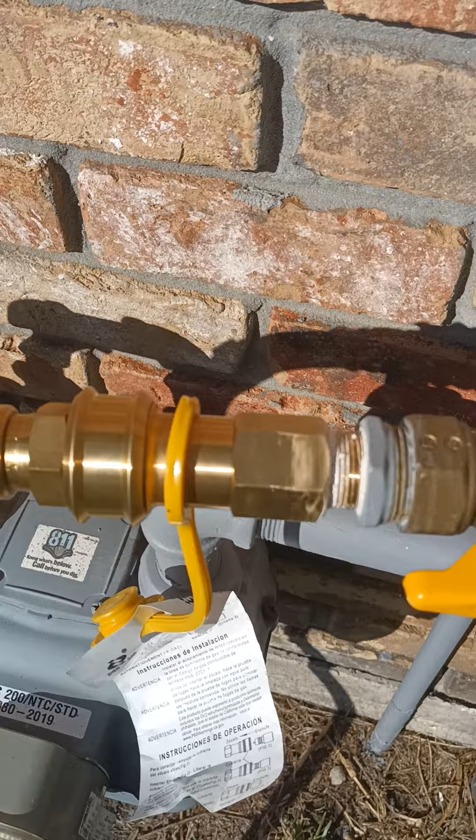So we're gonna start the whole thing. All right, I'm ready to do it. I left this valve off just for one start, just in case there's still too much gas in the carburetor. I'm gonna do one start push just in case, and then I'm gonna turn it back on. That's what we're gonna do.

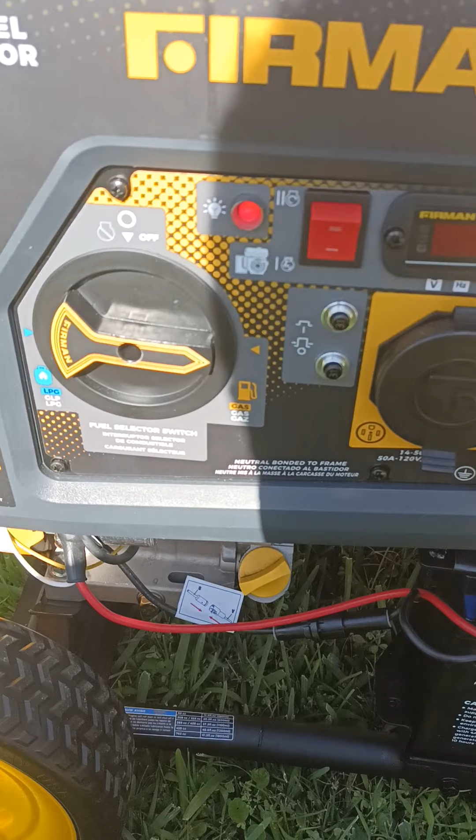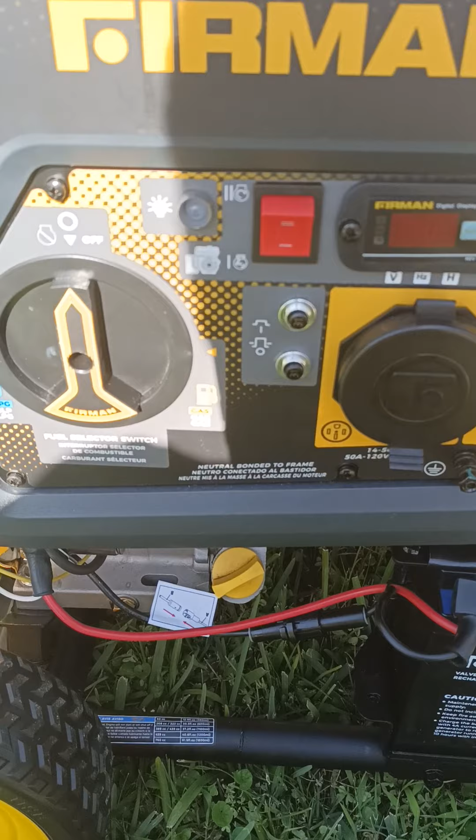Isn't it interesting that it actually ran with the valve off? All right, let's check again. Valve is off and it's running. That means there is too much gas in the carburetor.